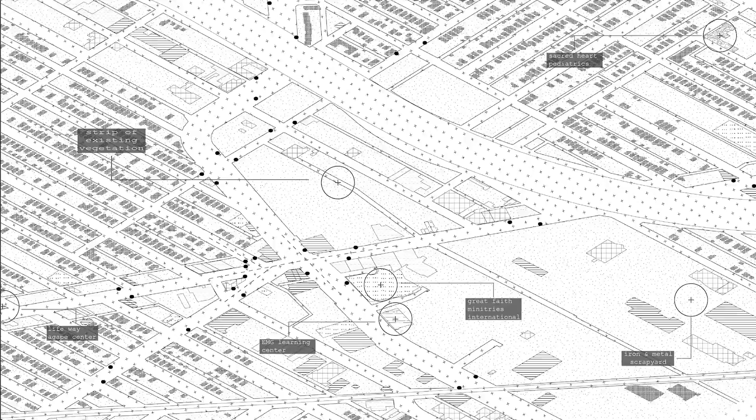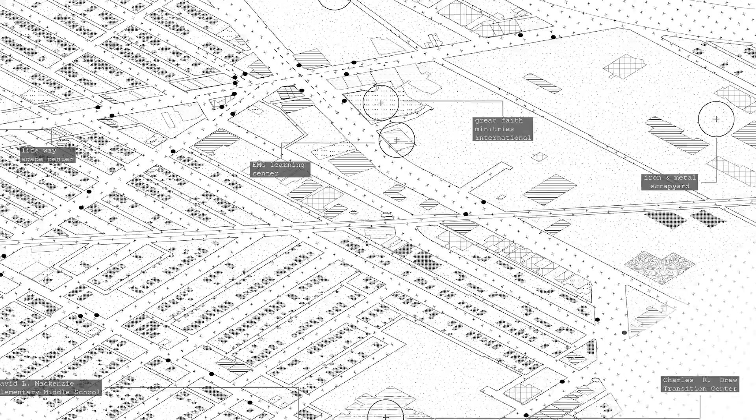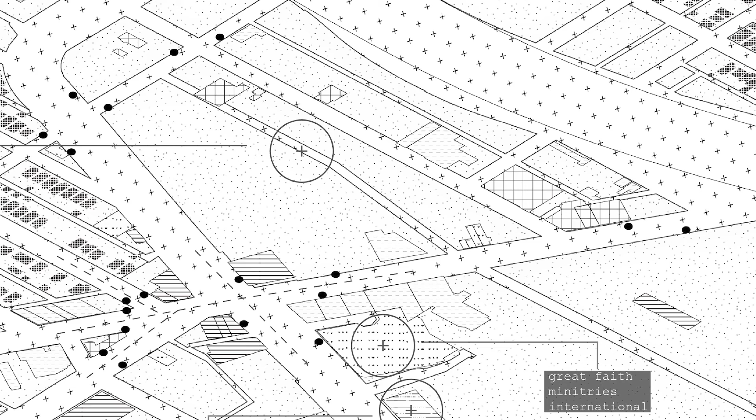The existing Old Sears site is located between zones of industrial land, single-family housing, and the commercial corridor of Grand River Avenue. The community is interwoven with not-for-profit organizations and religious groups which offer learning centers and faith-based discourse. The Old Sears site represents a vast set of parcels of mostly industrial and residential land at 265,000 square feet. The building remnants of a once flourishing commercial intersection are now mostly vacant, with the Oakman building still standing at the corner of Grand River Avenue and Oakman Boulevard.

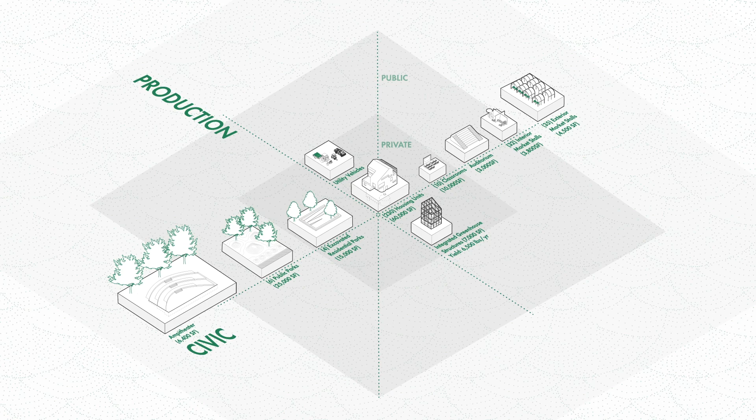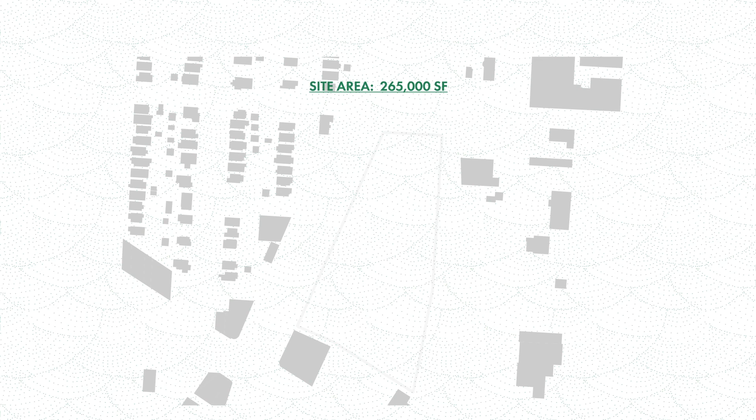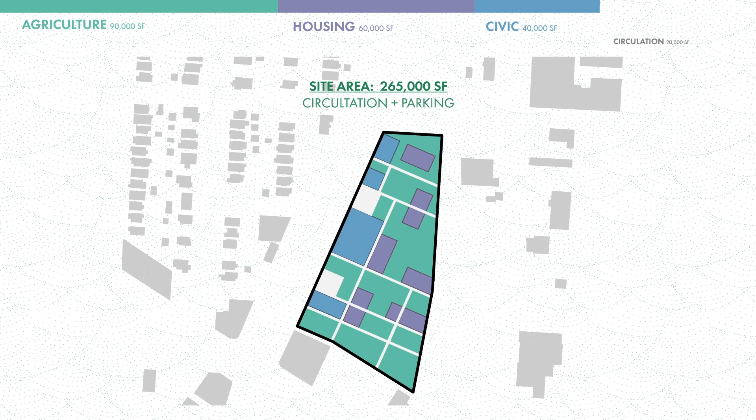City Plus Farm reorders the site through a series of private, civic, and production programs with a domestic enclosure at the site's center. City Plus Farm hopes to reconcile urban domesticities with agricultural production through a patchwork of private, civic, and farming zones across the Old Sears site. Agricultural land takes up roughly 35% of the site, while housing and surrounding recreational spaces account for another 45%. Civic programs such as auditorium, classroom, and marketplace frame the remaining 20%.

The project's major districts are divided into linear strata containing building sites and agricultural zones across the site, while circulation paths cross these zones, creating patchworks of production and domesticities. Public and private parks further articulate the site and allow for interstitial outdoor zones for recreation.

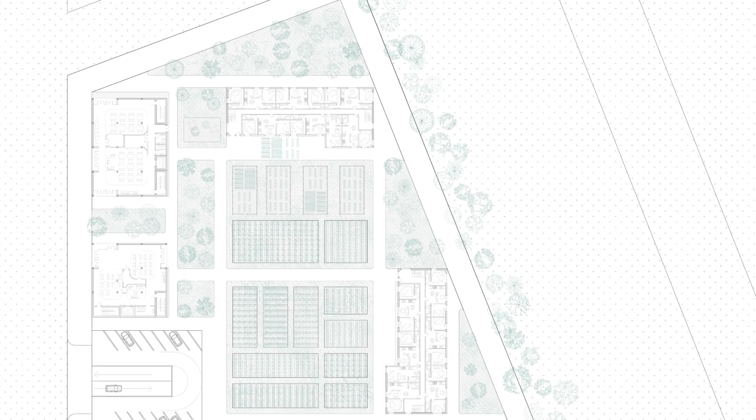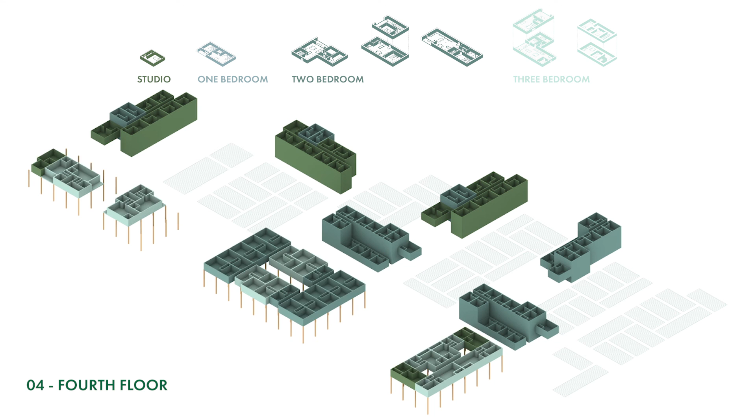Civic Building A houses performance spaces, and Building B a central market and food hall at ground and second level. Buildings C and D provide ground floor space for communal learning centers. The unit types are divided among the separate buildings and accommodate 1 to 3 bedroom apartments. Residential units stack above the civic program, creating the 4 low-rise towers along Oakman Boulevard.

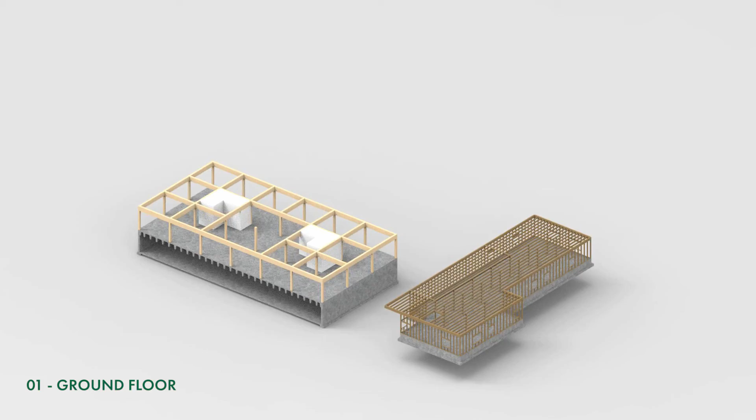Six linear garden houses exist at the east of the Civic Building, branching towards the Joe Louis Greenway, while agricultural structures such as greenhouses and hoop houses aggregate near. The 2 building types are differentiated in form and structural systems. The Oakman Towers utilize a CLT structural system with 20-foot spans, while the garden houses are constructed with a light frame wood structure familiar within the single-family residences of Detroit.

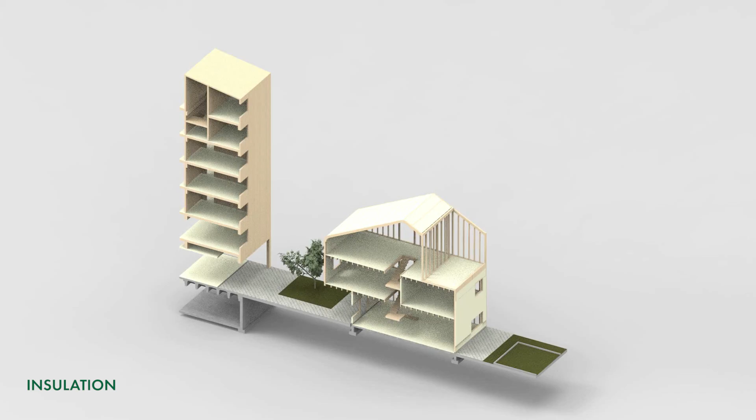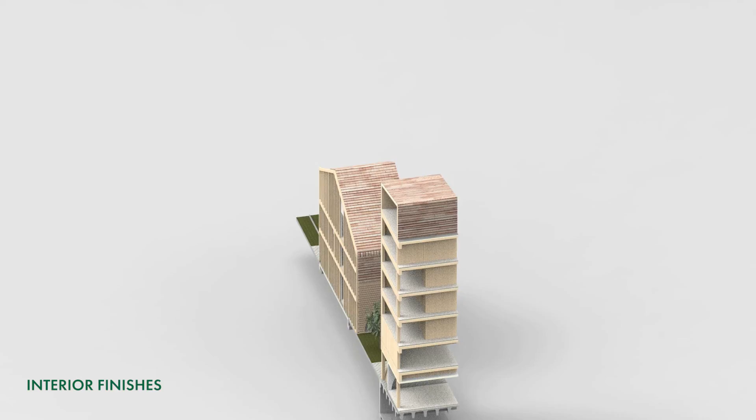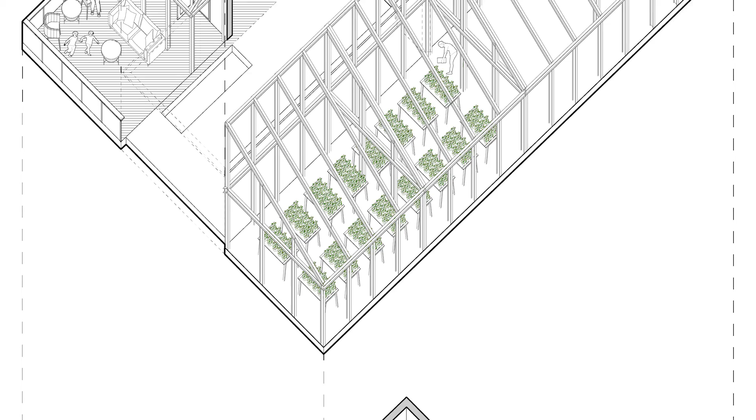The buildings express a material language tied to the natural environment through slatted wood boards and ceramic tiles. The scale of this articulation is consistent across the scales of buildings, representing a domestic community. The Oakman Towers accommodate a unique unit type at roof level, integrating 2-story units with greenhouse structures and communal spaces above.

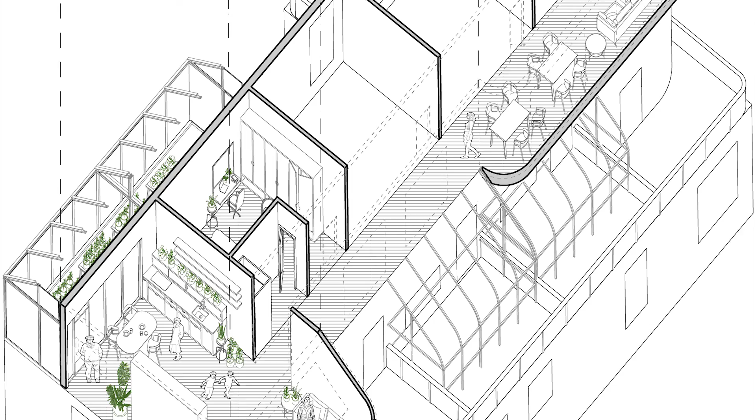Shared kitchen and lounge spaces are provided in the higher density garden houses, while private residential greenhouses are integrated into both towers and garden houses. Interior finishes continue the facade's natural sensibility with plywood-lined walls and cabinetry. This project, through its structural, material, and spatial logic, continues a narrative of agricultural production within the city of Detroit and its long-standing legacy.